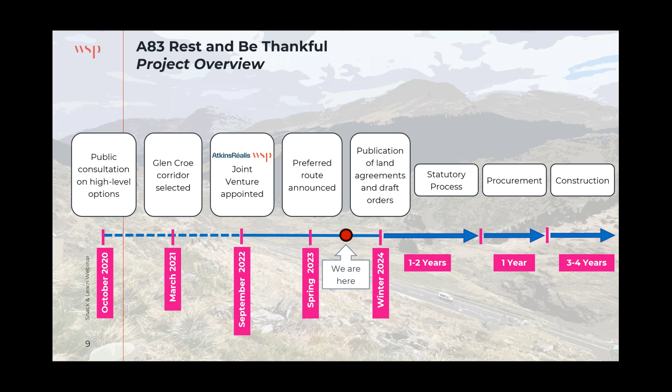So what were some of our key challenges? The A83 Rest and Be Thankful is a major civil engineering project in a sensitive environment, and the necessary planning and legal processes to develop the permanent solution have to be very robust, yet delivered in a time-efficient manner to avoid frustration for businesses and local communities who rely on the road. Therefore, Transport Scotland, our client, set a challenging timescale for completion.

In order to meet the project's challenging milestones, the team assessed different strategies to accelerate delivery. One of these strategies consisted in the adoption of innovative approaches focused on digital solutions and automation.

Following the comparative assessment of 5 route options, the preferred route for the permanent long-term solution was announced in spring 2023. This comprises a debris flow shelter about 1.8 kilometers long over the A83 road. Our digital approach was quite critical to achieve this significant milestone, so let's dive into some of the digital solutions we implemented.

Our digital strategy does not consist of a single initiative or an all-encompassing system, but a set of many solutions and improvements that together have brought, and are still bringing, significant efficiencies to accelerate delivery. We can divide these into 2 separate groups: digital design and information management. Each group has a set of digital solutions and initiatives, which we'll briefly explore next.

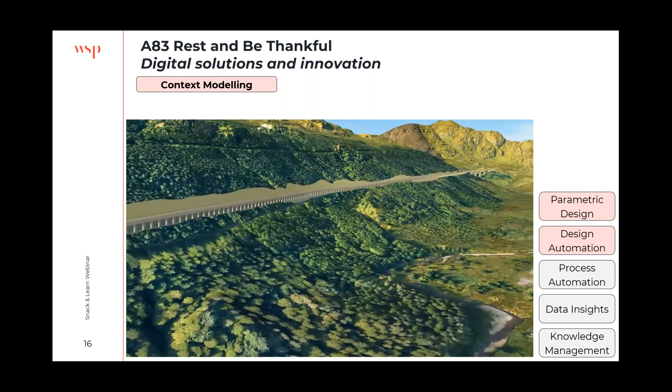Several route options were able to be developed quickly and efficiently as part of the preferred route identification process. The possibility of designing routes directly in 3D real-world context played a critical role in reducing the time it took to develop options and evaluate their impact against engineering, environmental, and economic criteria. Our design technology also allowed us to generate compelling and immersive visual presentations for our client and other stakeholders very quickly.

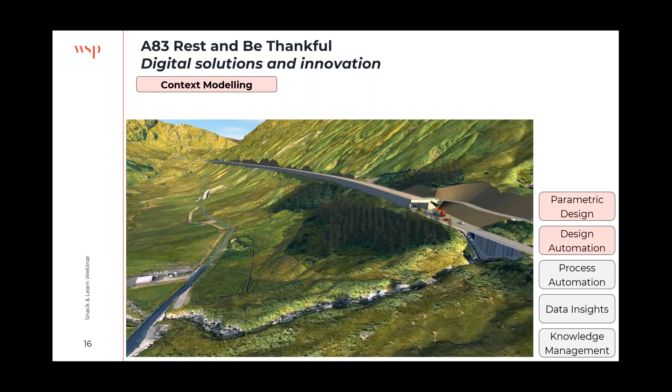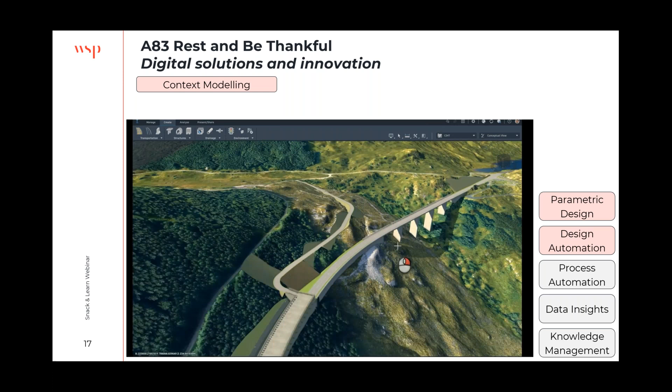The technology we used provided a set of powerful analysis tools. For example, changes could be made in the view style to visualize contours and underground elements. Team members could then perform different kinds of measurements directly in the 3D model, including linear 3D distance, 2D distance, slope, and area statistics.

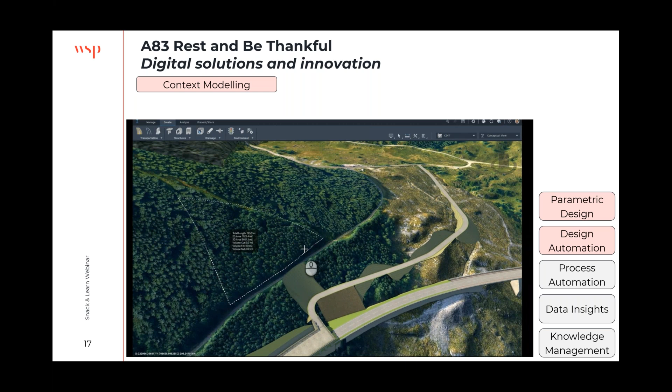These tools enable team members to view cross-sections of the road corridor dynamically, as well as inspect the geometry of the vertical alignment.

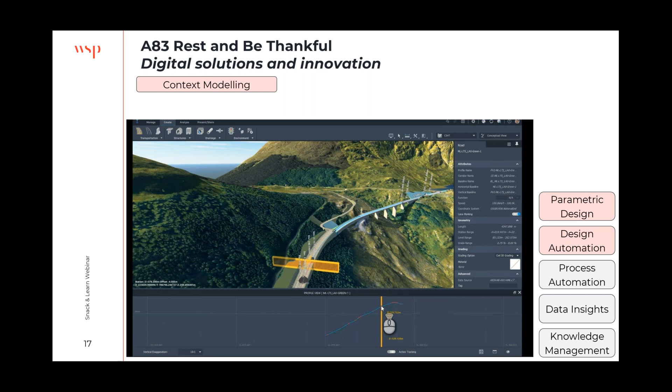We also had tools that allowed us to visualize light and shadows at different times of the day for any selected date. This was very useful for the environmental and tunnel operation teams.

Properly scaled 3D objects, such as construction equipment and vehicles, could be quickly placed on the model to help with the assessment of space constraints, constructability, and maintenance operations.

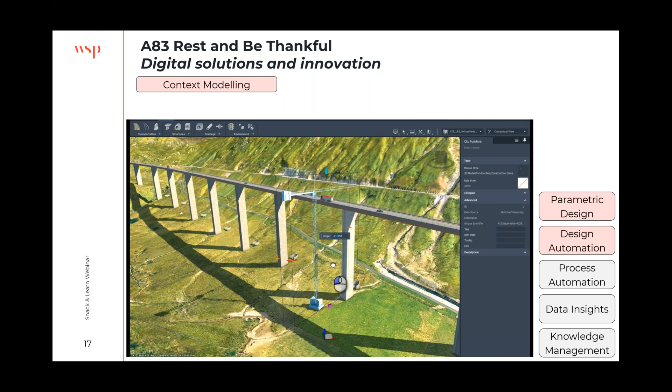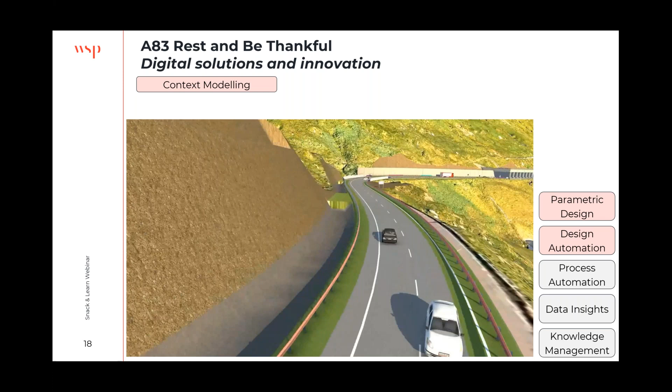We're still using the 3D visualization model during the development of the preferred route option. This is a very powerful asset for the entire project team, as they can explore the proposals at their leisure, and the model gets updated regularly as the project progresses.

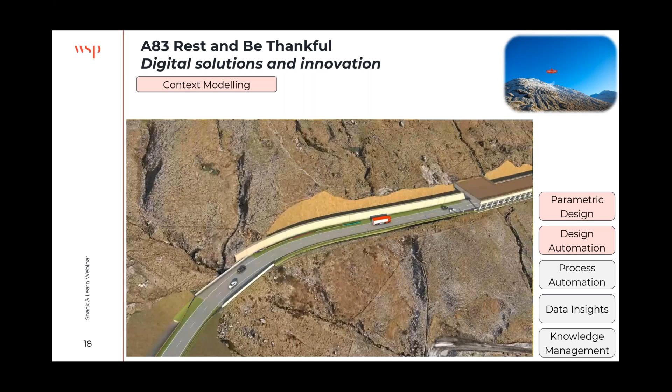Furthermore, we have carried out drone surveys in the area, and the resulting point clouds can be seamlessly integrated with our 3D visualization model to provide an outstanding level of detail. This empowers our teams to better evaluate how the design interfaces with existing terrain conditions.

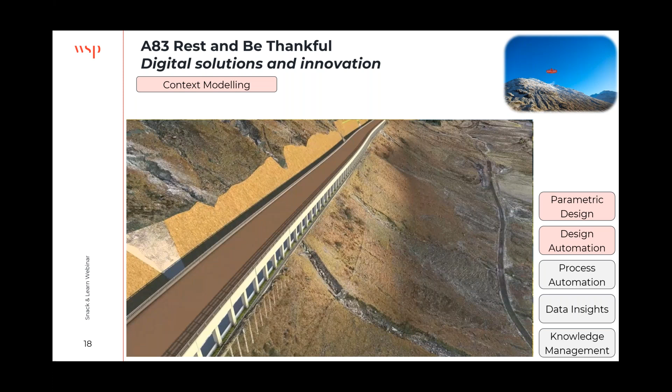We also use the parametric design tools available in our design software. With this, our structural engineers were able to sketch the layout of structures such as bridges, tunnels, and debris flow shelters in hours instead of days. Structural elements were easy to edit and update to test different configurations and alternatives.

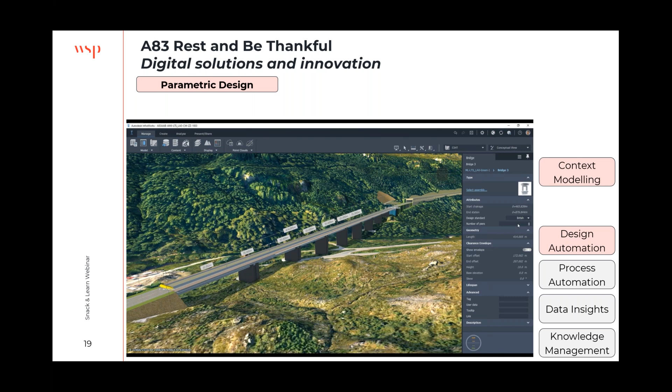Our engineers could then assess not only the structure's form, but also its impact on the surrounding area and its constructability. Moreover, designers were able to update structures' layouts automatically if there were any changes in the associated alignment geometry.

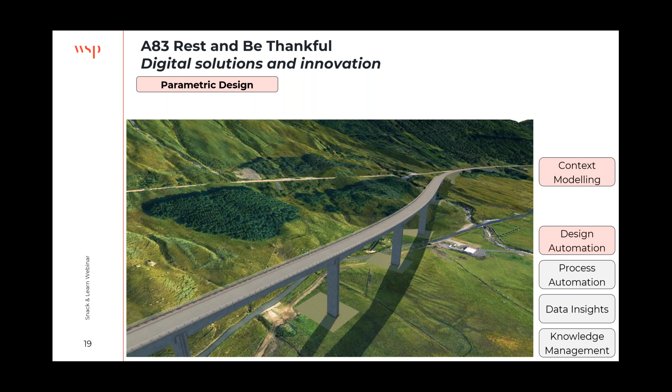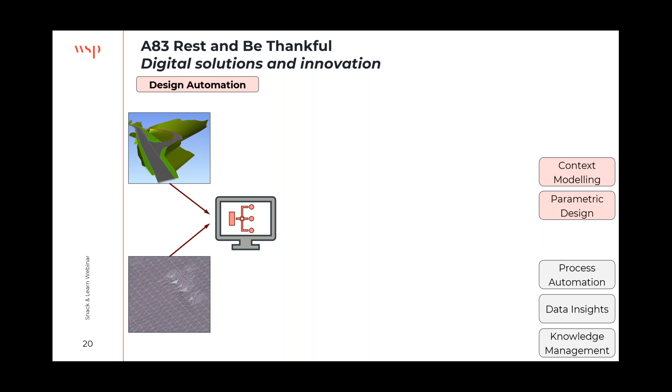For the development of the preferred route, we developed tools and scripts to automate some aspects of the design. For example, we created scripts using visual programming that use digital inputs such as the road corridor and the rock surface models, and automate the creation of the geometry for the debris flow shelter structure based on a set of rules. This geometry is then exported to our structural analysis software, also exported to create the 3D discipline exchange model, which is then referenced in our virtual 3D visualization model. This creates a very powerful design method, allowing for multiple iterations of the models to be investigated and analyzed rapidly.

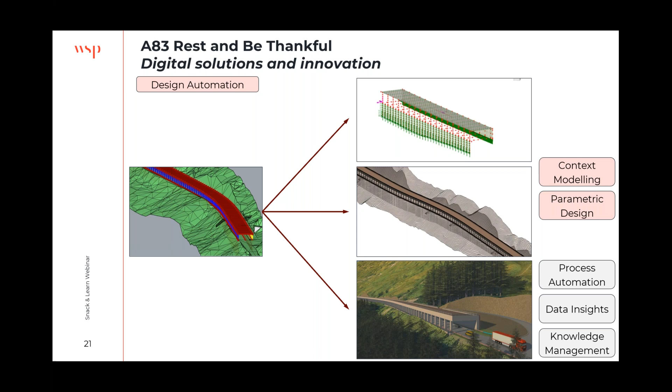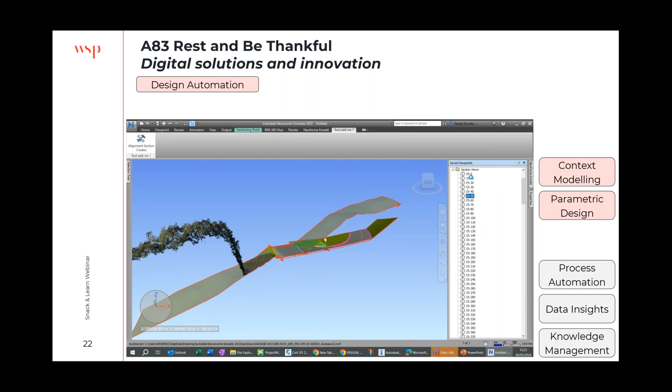Another example is a script we developed specifically for our federated model. This takes the geometry data from our mainline alignment and automatically generates cross-sections at any chosen interval as needed. These cross-sections are very useful for the entire project team and allow us to better understand how the design elements for the road interface with each other and with the terrain.

Of course, it's not all about the design, but also the initiatives we implemented to improve our information management processes. One of the key solutions is our project members management system. Our project requires a very large number of staff from various disciplines and organizations.

This brings difficulties in terms of getting the right data in a timely manner for client approval, and also in terms of giving quick access to the project's common data environment systems, with the right permissions and appropriate onboarding. It's worth pointing out that our common data environment systems consist of 5 separate solutions.

With our system, any prospective project member needs to complete an online form, providing the necessary data for approval. When this form is submitted, an automated workflow is triggered, which saves the form's data in a master list. It then sends the approval request to the project managers, who can review the new member's data and make any adjustments if necessary.

And of course, approve or reject the request. If the new member is approved, an automated notification is sent to our system administrator so they can grant access to the new members as per required permission levels and proceed with the onboarding process. The project members' records are displayed in a Power BI dashboard, which is used regularly to track the status of project members, ensuring only active members have access to our systems.

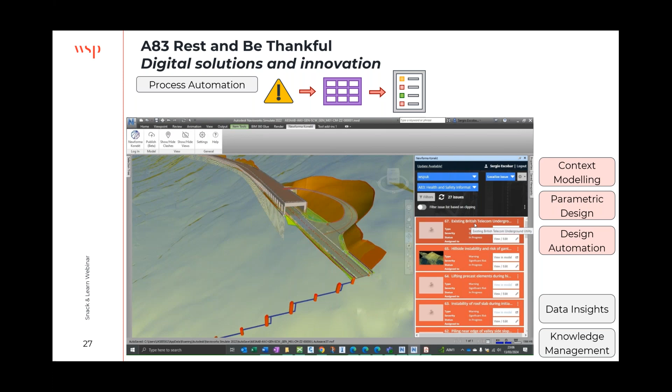Our solution encompasses an online health and safety risk register that can be accessed by any member of the team in just one click from our SharePoint site. Any project member that has identified a risk can easily create a new record in the register, which automatically creates a new linked record in our design collaboration platform. This in turn allows us to easily geolocate the risks using the federated model. It is worth pointing out that several locations can be associated to a single risk record.

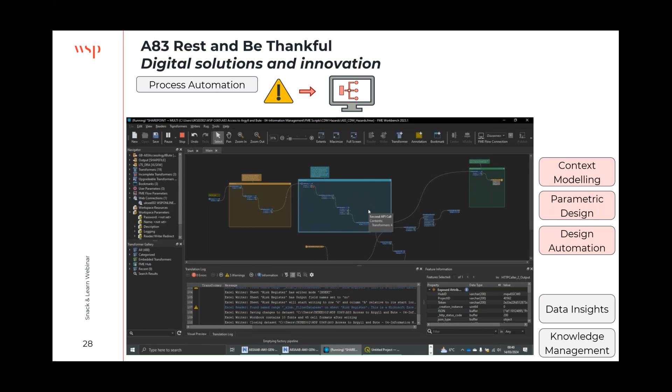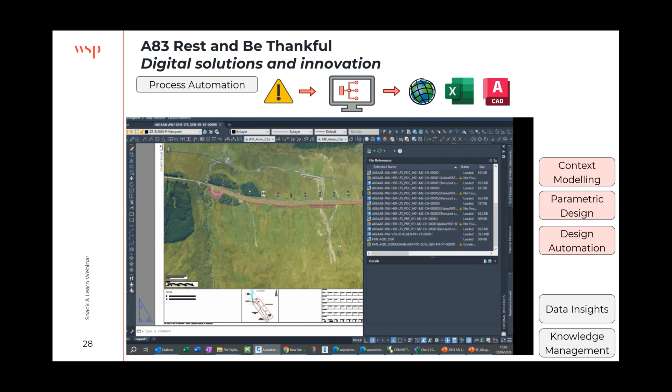We then use a visual programming tool application to leverage the data in these records and automate the creation of various key outputs to communicate the hazards, including GIS datasets for displaying hazards in a WebGIS platform, Excel spreadsheets for sharing our health and safety register with external stakeholders, and CAD references with hazard triangles and health and safety information boxes populated automatically, which we use in our drawings.

It is worth pointing out that we can use all these outputs to display the hazards in our detailed visualization model. There are more solutions that we have developed and implemented to automate our processes, such as our document transmittal system. But in the interest of time, we'll continue with our next topic.

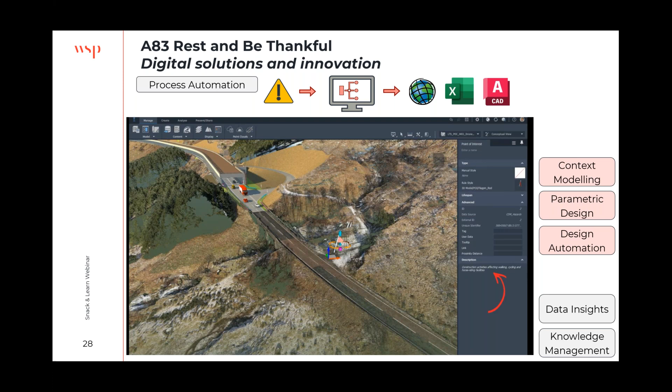Another key initiative is the provision of interactive reports and dashboards that can provide very useful data insights for better decision making. We have already seen an example of this with the dashboards we use to manage the project team members. But also, we created dashboards to help us track the project actions and tasks. We're in the process of developing more useful dashboards, for instance, to better help us track the status of our deliverables. But the example I want to show you relates to our level of information need tool.

To give you some context, the level of information need is a term that comes from the International BIM standards ISO 19650. This is the framework that defines the extent and granularity of information to be produced. The level of information need basically specifies what information needs to be produced by each discipline at each project stage. Our framework is subdivided into level of geometrical detail applicable to design models, level of information applicable to asset data, and level of information for documentation, which applies to documents such as drawings and reports.

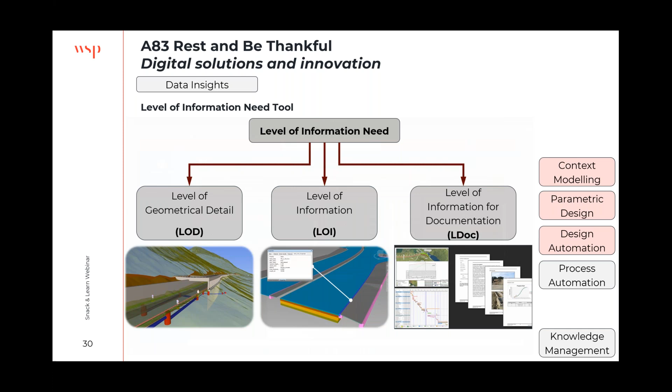The problem is often that these are very difficult to read and understand. To mitigate this problem, we created a level of information need tool to enhance the team members' experience and understanding of the project's information requirements.

This tool displays the required level of detail and level of information for all the project's assets in a single page, which can be quickly filtered based on key parameters such as project stage and discipline. It also displays the level of information for documentation, which lists all the relevant requirements for documents such as drawings and reports.

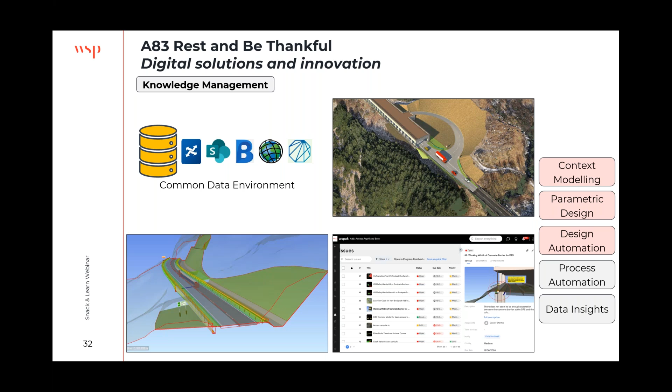To finalize, I will touch on our knowledge management strategy. As you have seen in my previous examples, we not only have adopted a range of common data environment systems, each with a specific purpose, but we also implemented a few advanced applications and platforms. One of our main challenges is that not all the project team members were familiar with this.

In addition, we implemented numerous processes, workflows, and digital tools which were completely new for the majority of the team. As you can see, it was a steep learning curve, and we had to find a way to make this journey as smooth as possible.

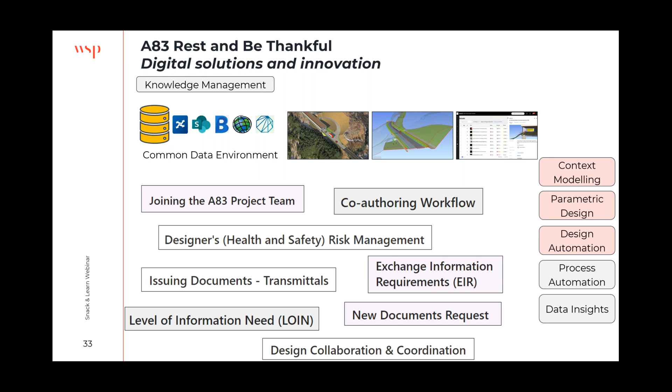For this, we use SharePoint as the front-facing platform for the project. Through the SharePoint site, users can quickly understand and access project procedures, such as requesting for a new team member to join the project, or requesting the issue of a new transmittal for processing by the document controllers.

But quite importantly, clear guidance in relation to our digital delivery process and technology. This includes links to the key documents, as well as webinar recordings.